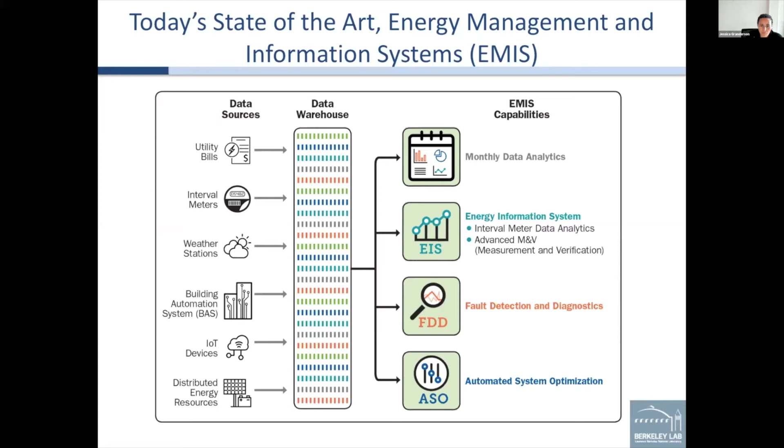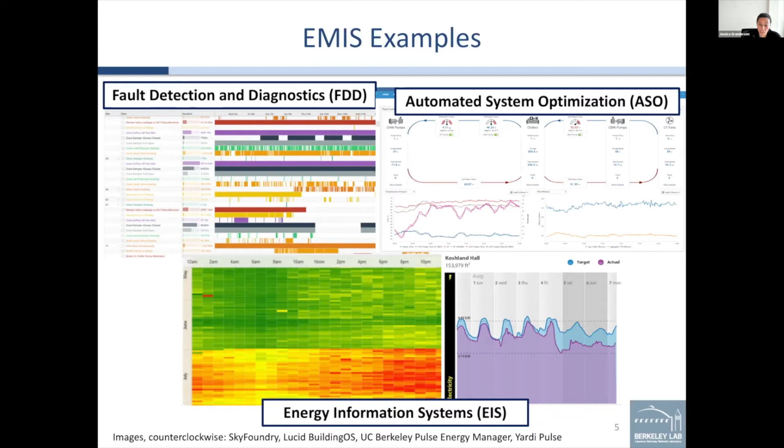Two points I want to make about this technology and how it differs from other smart building technologies or efficient building equipment. And the first is that these are very much human-in-the-loop process tools. So to gain any benefit, the user, the building engineer or the operator has to actually take the findings that are surfaced through the technology and translate that into some action to either resolve problems or make efficiency improvements.

We're really talking about an ongoing process to continuously monitor for opportunities or problems, fix them, and then track performance to ensure that savings are maximized and that they persist over time.

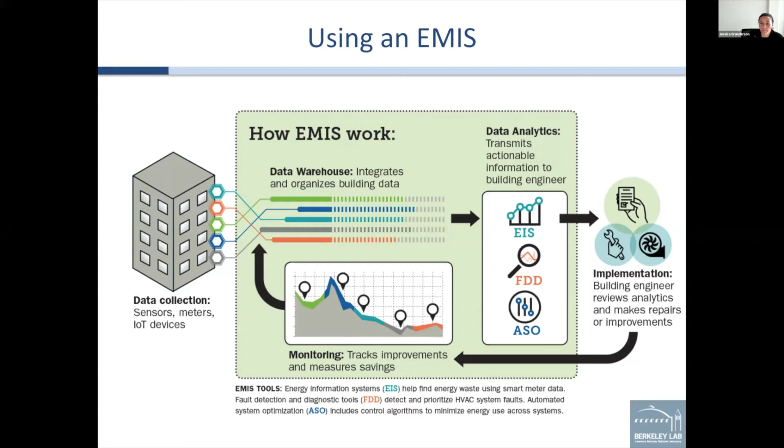So what we used to be able to say about this technology is that there was very compelling savings potential, anywhere from say 5 or 15% of whole building energy use savings resulting from their use. And that was across a wide body of case studies. A lot of those studies were generated by the technology providers and vendors themselves, and they would use different methodologies, different metrics, and that made it really tough to synthesize across findings

or really generalize and say, what do users save on average? And unlike hardware, there was really no information in the public domain about what does this stuff cost. You would have to start your way down the path of procurement and discussion with the vendor to even get any notion of cost. So that all added up to under adoption of the technology, really driven by uncertainty in the business case and the value proposition.

So with that kind of base level of understanding as our foundation, our team worked with 104 portfolio or campus scale organizations to conduct the most comprehensive study to date on the costs and benefits of EMIS technology. Our study scope covered over 500 million square feet of technology installed space, 6,500 buildings, and our participants and partners in this work were using some 40 different off-the-shelf analytics and diagnostic technologies.

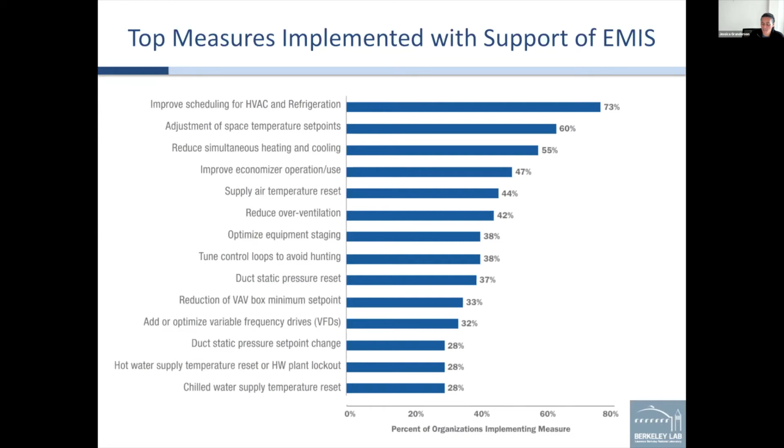A whole other series of measures, all associated with set points and reset schedules. So that could be overnight and weekend low occupancy setbacks. That could be making sure that supply air temperature and duct static pressure resets are working right at the air handler level, all the way up to chilled and hot water supply temperature resets at the central plant level. That's really the core of the most commonly identified issues that are translating into these material savings with rapid payback.

The meter analytics technologies, we can focus on cost per square foot, about a penny. Now, these are very large installations with the average of 1 to 5 million square feet. So you wouldn't necessarily extrapolate this into single building sites.

$1 penny a square foot upfront, as well as recurring. Now, when you move into the fault diagnostic class, you're now incurring more upfront cost. And this is really driven by the need to integrate the data going into the building automation and control system, more complexity there, and just a far greater volume of data that's being ingested and interpreted.

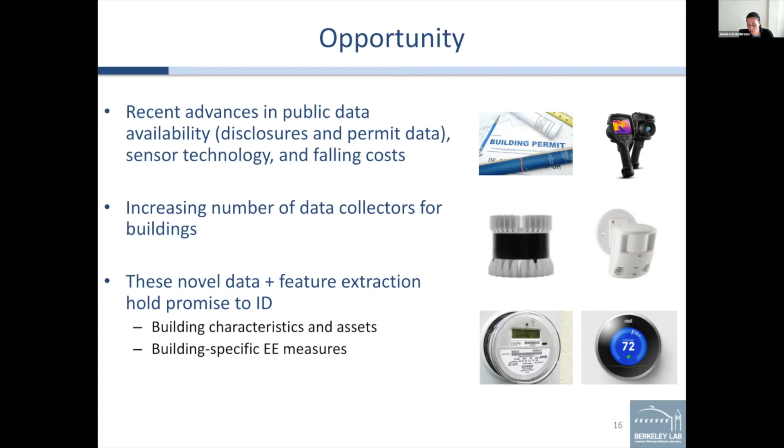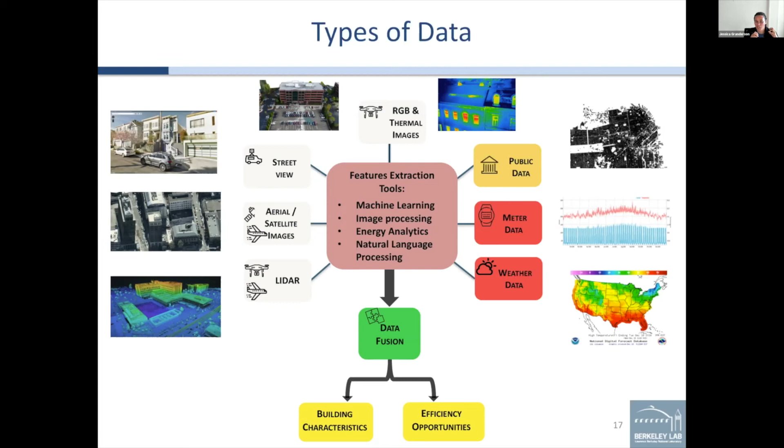Now we're interested in what additional information can be gathered from things like RGB and thermal images, from either street level orientations, aerial and satellite images, or even LiDAR, and how we can fuse across these sources to extract better understanding of building typology and characteristics and those efficiency opportunities.

So what I'd like to share is work specifically around drone-based acquisition of thermal and RGB images. Cameras and drone hardware are far less expensive than they were 5 and 10 years ago. We've also got a lot of advances in machine learning, computer vision, and image analysis.

And I'll share how we're applying these techniques to auto-generate 3D building geometries, to extract exterior features. I'll focus on windows, but we could also imagine identifying photovoltaics and rooftop packaged units. And also identification of thermal anomalies. This is critical because everything I showed you on the analytics side so far was really absent of the thermal dimension because we just don't have that information available at scale today for most of our buildings.

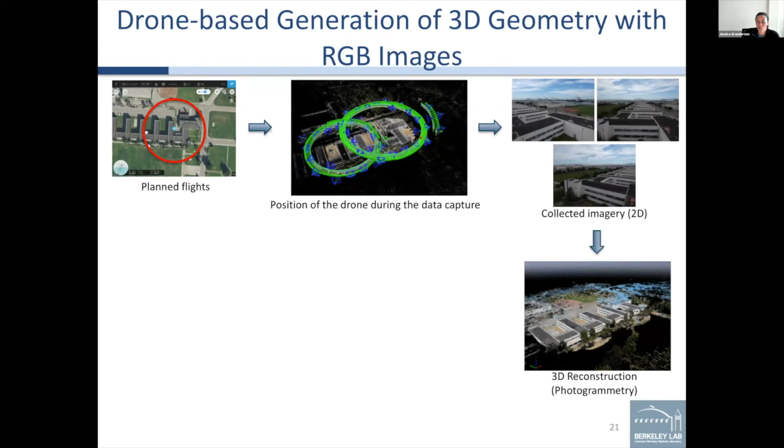So starting with auto generation of 3D geometry, the first thing we do is take a building of interest and plan our drone flight. The flight that we take is often overlapping circles over the building where we're constantly snapping pictures. We build up a library of 2D RGB images. From there, we apply off-the-shelf photogrammetry software that builds for us a 3D reconstruction from those 2D images, along with a lot of associated metadata.

The R&D comes into play when we start then applying line transformation and polygonization algorithms to extract the building footprint and the associated heights at each point along the building structure. From that point, we can then merge the information and generate a 3D model of the building in GeoJSON format for easy ingestion into other analytical packages.

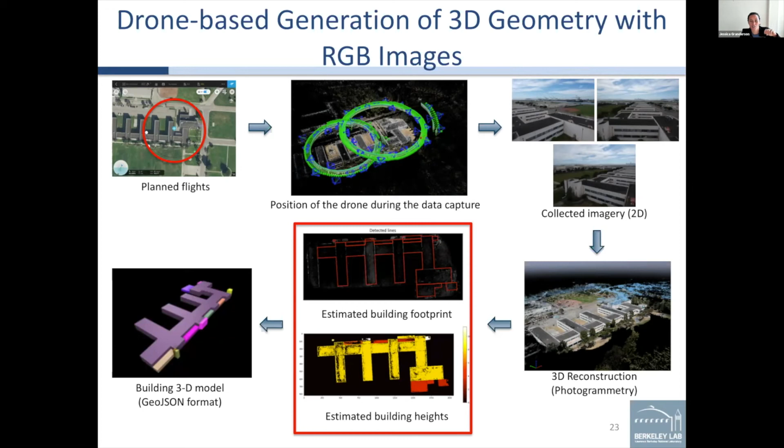What's compelling about this is it shows promise to actually be scalable. It takes about 2 hours to do the flyover and image capture over a medium-sized building. Then, depending on your computational power, about a day to then post-process the data and spit out that auto-created 3D GeoJSON model.

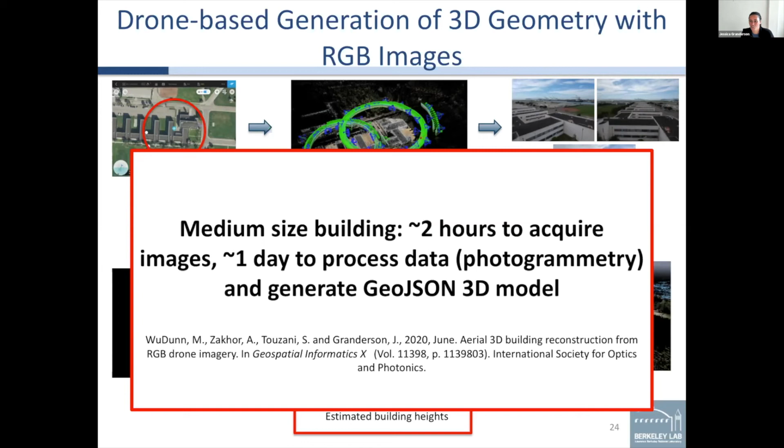Next, I'll step you through how we're extracting exterior features from the building. I will talk about window to wall ratio. That's a very important driver of building energy consumption and loads, a key input to simulation tools that may be under the hood of many of the analytics packages that are available today. This is an important parameter that nonetheless is rarely known in the same way that square footage is for existing buildings.

So we begin again with our collection of 2D RGB images. We then apply a trained neural network deep learning model to be able to understand which pixels in that image correspond to the windows on the building. That is then represented here in what we call predicted window masks, a binary representation of each of the pixels that correspond to the windows in the 2D image.

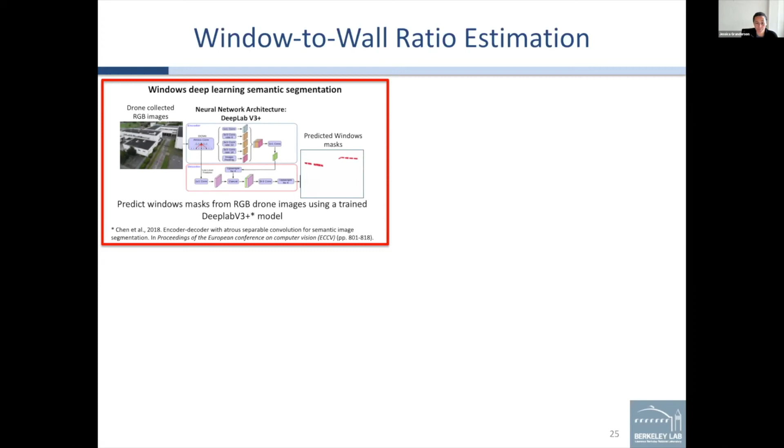From that point, we then need to understand the 3D dimension in order to figure out where the windows lie on each facade in the building. So we bring in our 3D building model that I showed you previously, and we associate each of the 2D pixels with a 3D pixel. At that stage, we can then understand where each of those windows in our masks lie on the actual walls in the sort of Z dimension.

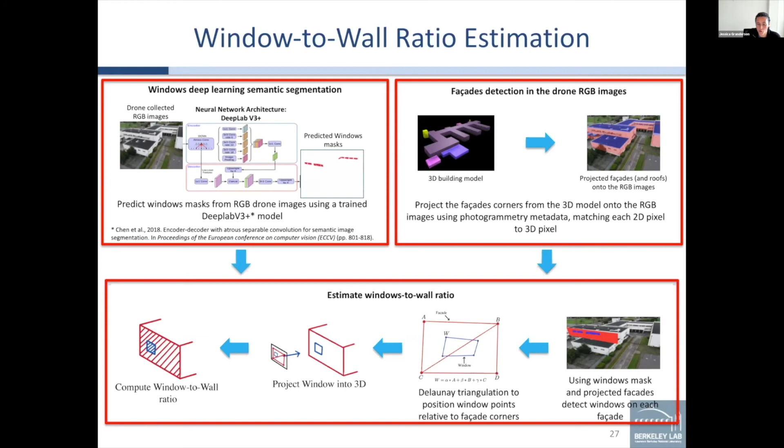And then we're off to the races. We do some triangulation, project back into 3D. And at that point, we have all of the geometric and volumetric information that's needed to compute that window to wall ratio, critical input to understanding energy flows and building energy performance.

Step 3, understanding something about the thermal profiles of the building and what thermal anomalies may exist. Here we are doing the same kind of data capture. We're flying circles above the building. But now we're collecting both RGB as well as thermal images in the 2D representation. The RGB is shown on top here in the slide, and the thermal is shown in grayscale right below it.

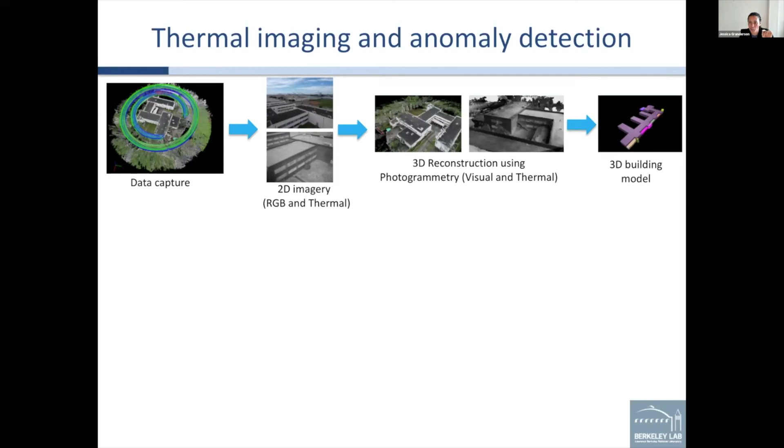We're going to reapply the same 3D reconstruction that we used to create the 3D geometry, but we're going to do that for both the RGB as well as the thermal representation. We can then understand from the 2D thermal images which pixels actually correspond to the building and which are all the surrounding stuff like pavement, trees, etc.

The same masks can be created to extract the anomalous pixels out of the 2D thermal image, and we do that through k-means clustering and some morphological operations. Once we have them, and that's shown in this black and red image here, we can superimpose them back onto the thermal image for further investigation by an analyst.

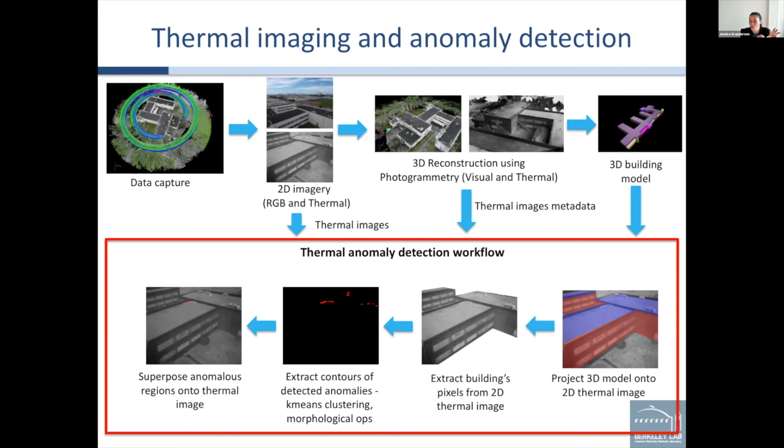We've now opened up the set of analyses that we can apply that introduce the whole thermal side of the equation beyond mechanical system operations. So that's a little bit of a peek behind the curtain. We're continuing this work, exploring how we can auto-create 3D geometries without drone-based image acquisition by fusing aerial images with LiDAR representations. We're field testing these techniques to understand what actually is the value of that new information that we're

creating. And I think really important when you think about the R&D and educational components of this work is that we've released it all as open source. We have tuned deep learning model architectures, and very critically, we've also released some of the labeled training data sets that are necessary to further extend these techniques and improve upon the existing tuned algorithms. That's really not something that you can readily access in the typical sense, and it's a huge barrier to actually being able to deploy and develop these kinds of techniques.

I'll conclude with just a couple key takeaways to leave you with. Remote analytics and smart building technologies are available today. They're enabling deep savings cost effectively. They're also introducing a real streamlining of operational processes. There's additional promise to advance the technology even further through some of these kinds of new data sources that I've highlighted today, and the feature extraction and data fusion techniques that I presented. Our starting orientation for much of our work is around efficiency measures. How can we identify them? How can we implement them?